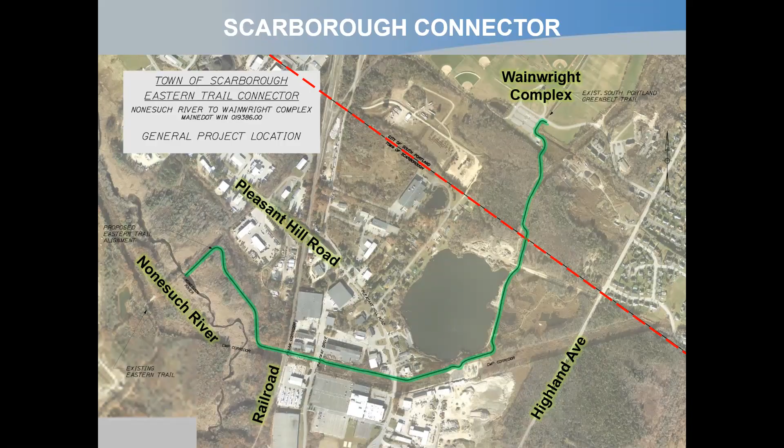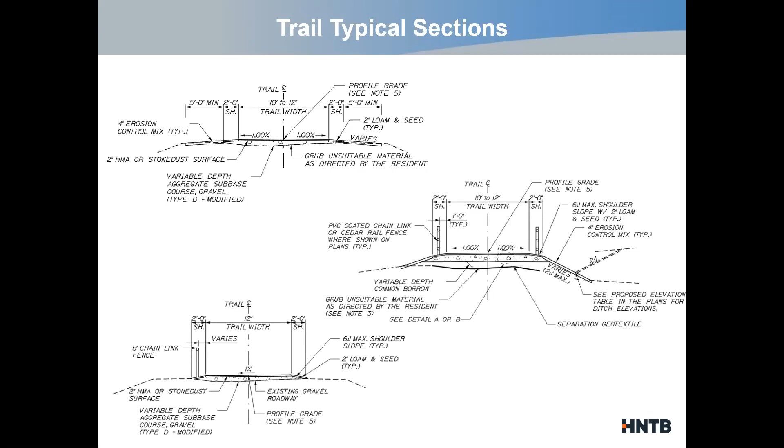So as we walk along that trail, I mentioned there are some very different sections—a river section, an industrial section, a pond, some woods. It's going to feel very different as you walk along this trail. But for the most part, what you'll see is a path that's 10 to 12 feet wide, either paved or lined with stone dust, that fine gray aggregate you've probably seen on a lot of trails. Depending on the topography, you may not have any railings at all on the side of the trail, or there might be railings on one or two sides if there are steep drop-offs, privacy concerns with landowners, or mitigation concerns with wetlands. I know these are just black and white graphics, hard to conceptualize, so I brought along a few slides to give examples of what this might look like.

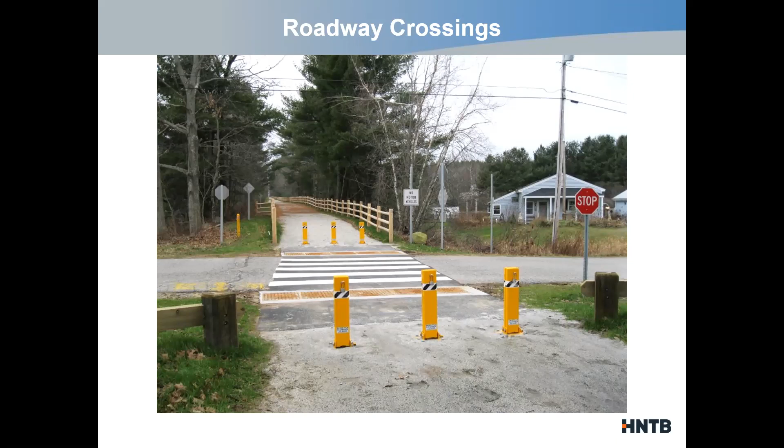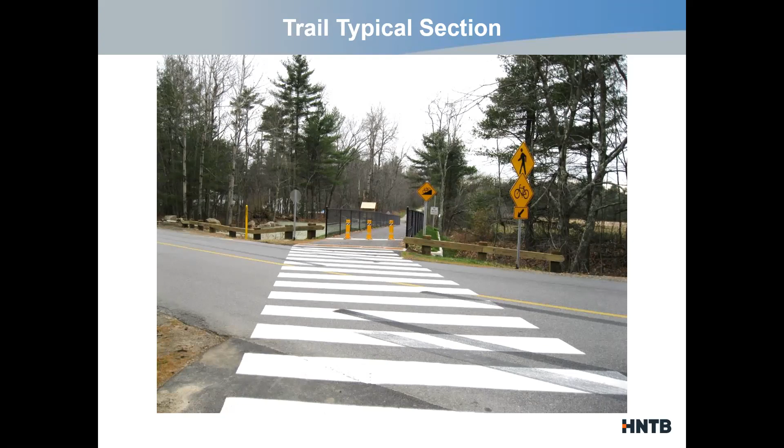So that's an overview of what the general sections will look like as you travel along this trail. Now I wanted to take a deeper dive and walk through the trail with you to provide an overview of what you might see.

It's not a very big crossing. The Nonesuch River crossing here is only about 35 feet long.

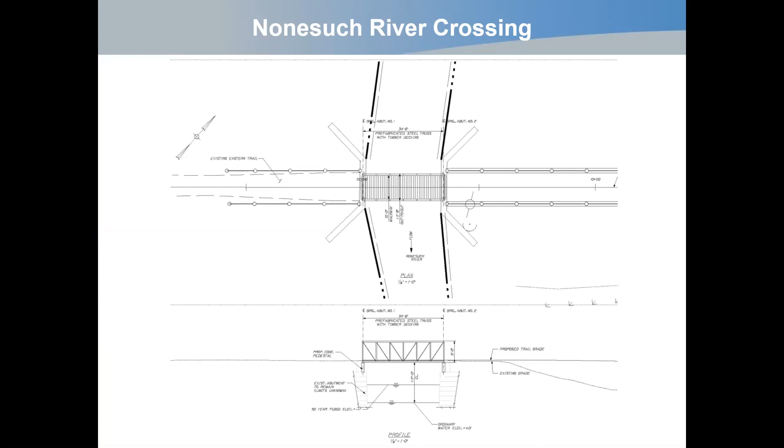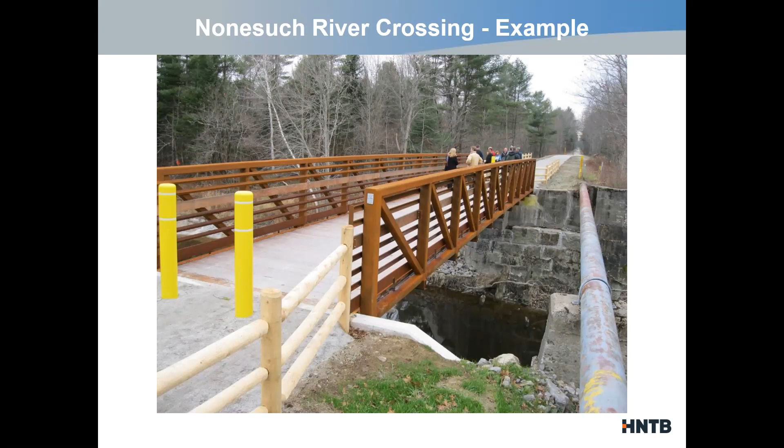You can see some stacked granite abutments or supports underneath that bridge. And just another example picture of what that might look like if you were looking from the side of the trail as it wraps around.

Where is that crossing that you just showed, out of curiosity? This particular one, I would have to go back and look. I forget, unfortunately.

It looks very similar. Yep, it is, very similar, and I believe it's along the Eastern Trail, down in Biddeford. Is that about the same scale as far as the distance, the length of the crossing? Yep, it's similar.

This one we see here is a little bit longer. I'd say this one's about 50 feet long. So a little bit longer and a little bit taller off the water, although it depends what time of day, because the Nonesuch River is slightly influenced by tidal fluctuations. Very slow moving, but slightly influenced.

We'll be going out there and putting a concrete cap on top of those abutments, simply to level things off and make it easier for that bridge to be dropped in.

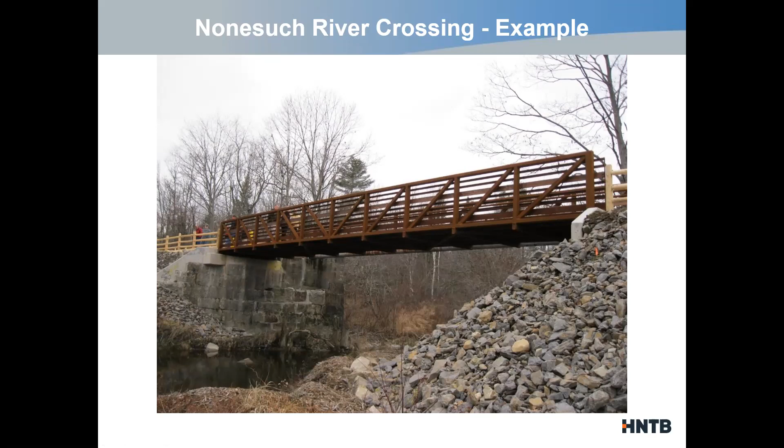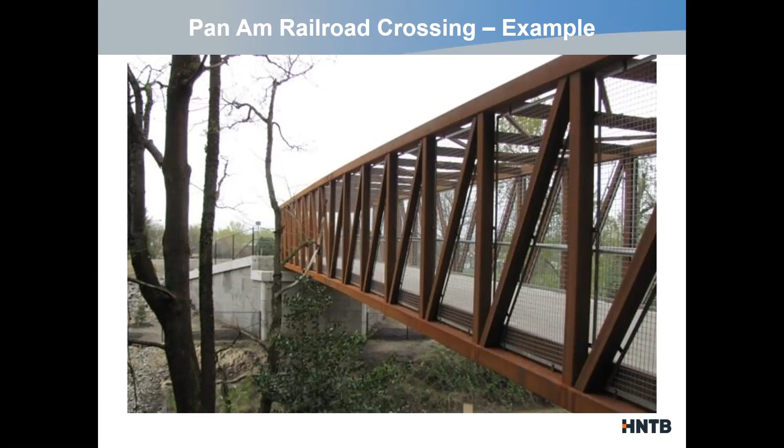So again, what'll it look like? This one's a little harder to find example photos of, but I found one that was pretty close. It'll be another prefabricated steel truss, but because of the overall bridge length, the sides will be a little taller and it'll actually have a top to it, so it's essentially walking through a big box. On the sides will be chain link fence or mesh to prevent people from throwing things onto the railroad tracks or littering, which is very common for crossing railroads. From the inside you might see something like this, though I can't guarantee nice tall pine trees like this going down through the industrial area.

So we come up over the railroad tracks on the left-hand side of the screen, 23 feet in the air to get over those tracks, and immediately start coming straight back down a trail to cross Parkway Drive at grade. It's a very steep hill to go up and over those tracks and back down. Once we get to Parkway Drive, we have the typical guardrail and sign package I showed you a picture of earlier.

We then cross Parkway Drive and go through the CMP corridor, which has a lot of different brush conditions along the back edge of these buildings. Then we make our way over to Pleasant Hill Road, which is really the next segment of our trail section, going from Pleasant Hill up around the pond. Pleasant Hill Road, as I'm sure you're all aware, is a very busy road, and we're crossing it right along a curve, in this generalized area.

This is another place where we negotiated with property owners and CMP, and we pulled the trail away from the northern edge of their right of way, down between the two power lines, to cross at a slightly better location with better visibility. Recognizing the high traffic speeds, the curve in the road, and pedestrian safety, we're putting in a quite extensive sign package here and some flashing beacons to warn vehicles of pedestrians crossing at this location.

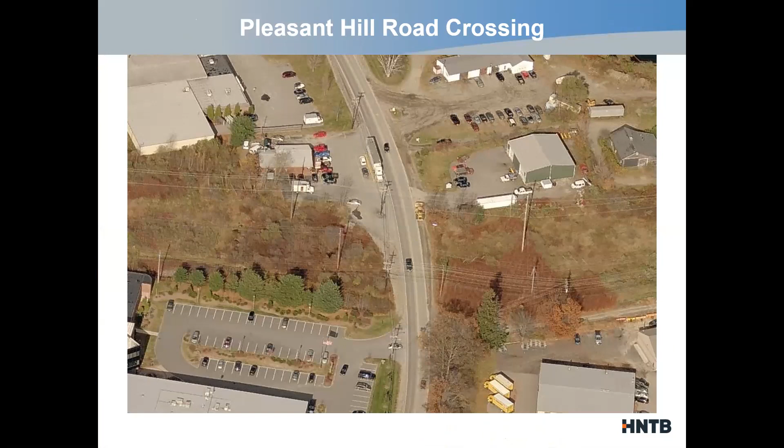That was an intentional decision we made after discussing constraints with CMP, trying to better align the project with its overall goals of providing a nice scenic view along the trail. So we're hugging the pond for a better view and getting away from that massive CMP substation out there, which would have been riddled with a lot of different constraints and hurdles to get through. We're moving away from that, hugging the pond, and things are better for everyone.

As we work our way along this trail, which wraps all the way around the pond, you can see it meets up with another driveway on the upper right-hand side of the screen. This is where we cross over a private drive, partially owned by a private land developer as well as the Portland Water District. We start to cross through a series of woods and man-made ditches that were built 50, 60 years ago. So this is where we start to see a lot more trees, a lot more private setting, and a lot more like that first trail section I showed you a picture of.

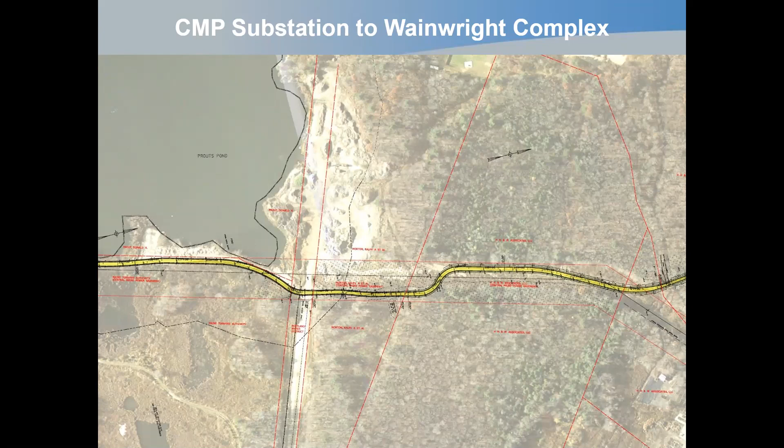This last image here as we enter the Wainwright complex is another location where we had to deviate from the original trail plan. We were cutting across the corner of a private parcel to reduce wetland impacts and reduce the number of ditches to cross. These ditches aren't huge, anywhere from 8 to 15, maybe 20 feet wide, and they'll be crossed with timber bridges. We were trying to go through there for overall betterment.

However, discussions with landowners pushed us to stay within a utility corridor as long as possible before making a turn up into the Wainwright complex. It's not a big difference—I think it added one little timber bridge—but in the end, it made the landowner happy.

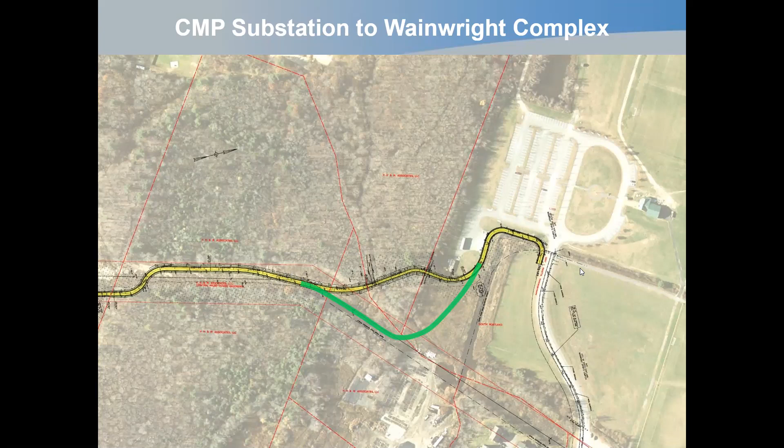Once we get up to the Wainwright complex, we simply follow the sidewalk around, and we are then across the driveway entrance, continuing on with the Eastern Trail once again. This is just a bird's eye view of the overall area, and you can see numerous ditches throughout, likely trying to dry the land at one point.

So that's the overview of the project and the trail walkthrough. Where are we? This project has been active since, I believe, 2011 or 2012, trying to find the right alignment and move it along. From a design perspective, building a contract for a contractor to work with, we're 98% of the way there. We've delivered what we call a 98% milestone and received comments from the town and the Department of Transportation. We have a handful of comments to correct, which update some contractual agreements, but we're essentially there in terms of figuring out what the trail is.

The bigger hurdles are more on the behind-the-scenes permitting and negotiations. We've received our draft environmental permits, meaning the Maine DEP and the Army Corps of Engineers both agree to the impacts and feasibility of the trail, and we've been able to move forward. However, we're not allowed to get final permits until we've secured all right-of-way for the trail—all easements, license agreements, etc. We're also negotiating small changes to the trail with a couple of landowners, which means we'll have to cycle back through the environmental permit application one more time to discuss changes with those permitting agencies.

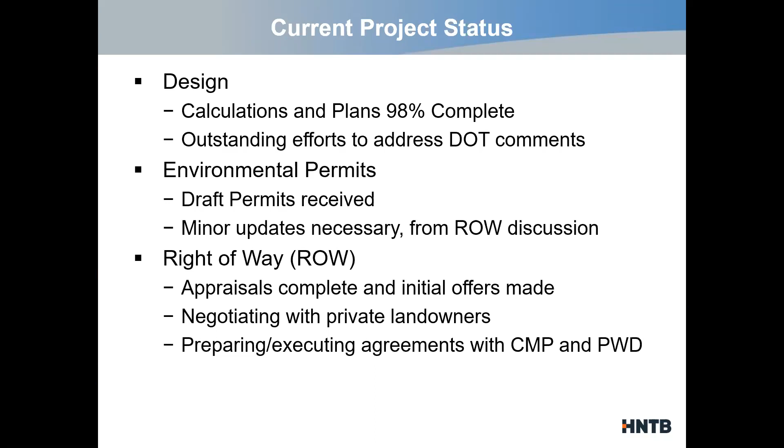We are currently really focused on right-of-way negotiations. We've done an appraisal of the impacted lands, made offers to the landowners, and now we're negotiating to try to find an agreement to construct the trail and move forward. There are a couple of private utilities, CMP and Portland Water District, where we're in the midst of preparing and executing agreements—we've come to terms and are moving forward. So it is positive. We do have some counteroffers from different landowners as well, and we're working through all of that.

So what does that mean for schedule? I do see the light at the end of the tunnel and am hopeful this is all going to advance. We're currently targeting wrapping up all the right-of-way negotiations, recording easements, finishing the last 2% of design, and getting those permits in hand to construct the trail and put this project out for advertisement later this year. Once advertised, it's going to be about 18 to 24 months of construction, really dependent on the power outages we're allowed to do to put that bridge in place.

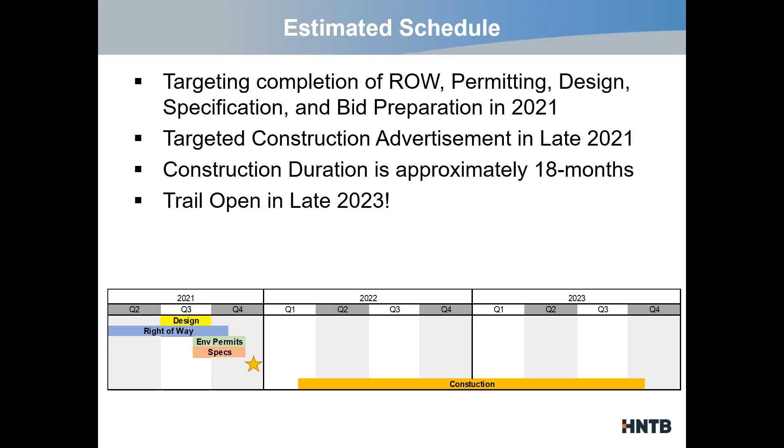With that, I'm going to leave it open for any questions you may have, whether it's about part of the trail, the process, or whatever it might be. I'll do my best to answer.

Question: I know there are flashing lights at various road crossings—is the intent to have those at every major road crossing, or just at places with fast traffic? Right now the only place we're looking at a flashing beacon is on Pleasant Hill Road. The crossings we have are Parkway Drive, a private industrial drive with some traffic but much less significant and slower speeds, and Pleasant Hill Road, plus a private drive partially owned by Portland Water District in that industrial area, which sees 1 or 2 cars a day moving at 10 miles an hour.

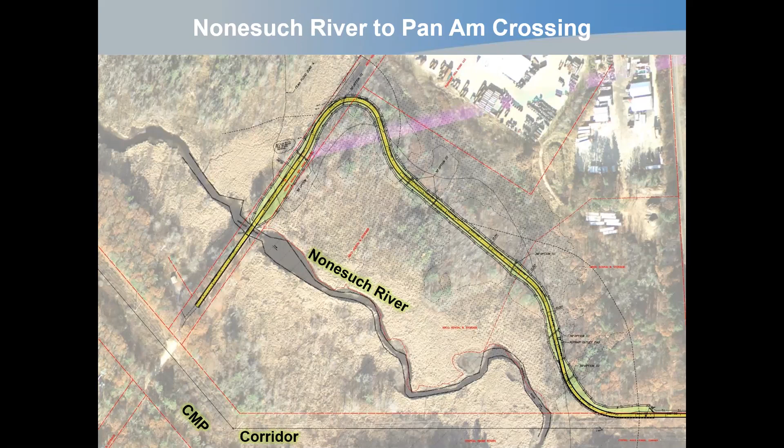So to that point, this view on screen doesn't do it justice because of the angle. When the bridge is in its final condition, the closest power line will be a little over 20 feet away from it laterally, so it would take quite the swing to hit the bridge. On top of that, we've been working with CMP to make sure that bridge is grounded, so it won't create shocks. The whole reason we have to kill the power during construction is because we have cranes sticking up in the air, and if those cranes tip over and hit the lines, that would be a major problem.

Josh, in relation to that railroad bridge we were just talking about, I believe earlier in the project there was some concern with local abutters regarding the right of way that was required, and that there might have been issues. Are those all resolved now?

Essentially, yes. The issues with those landowners — we are no longer impacting their right of way whatsoever. And conveniently, there's a private drive through this area, just off to the right-hand side of the screen, that crosses the CMP corridor. CMP has actually worked with us to help restore some easement language with that property owner as a benefit to the project and help things move forward. So those concerns have been addressed. Okay, thank you.

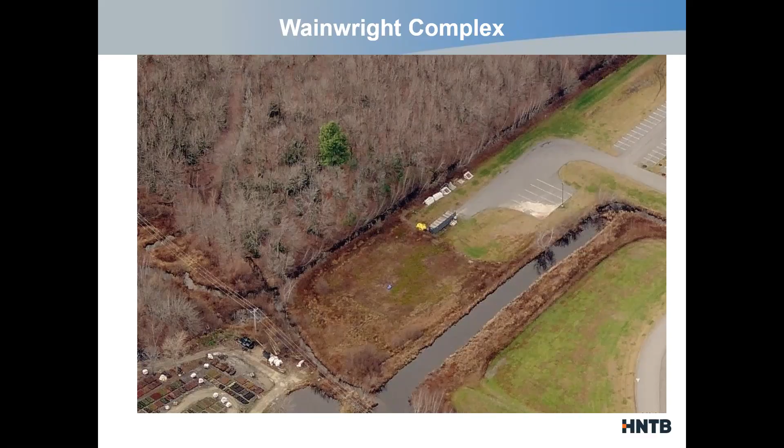Two of the active rails, yes. Amtrak comes through here and goes to the Portland station. So once you've put in the new bridge over the Nonesuch and where you're laying the new trail along the older rail corridor, even before that.

Going south of that, no, there's nothing there for quite a ways. No rails in there. So it's just the land. Correct, yeah, CMP actually took that over as part of their property almost a century ago. Cool, that makes it easier.

The thing that's interesting, Angela, is I've read the pieces occasionally, like in the Leader, about what's going on, but it's easy to forget all this stuff. To the best of my recollection, the biggest issue was always the bridge over the Nonesuch. And that doesn't seem to be as much of a problem as the bridge over the railroad tracks, which I was not even aware of.

The one over the Nonesuch is quite simple, but it's got some little challenges here to make sure it's in place correctly. The one over the railroad tracks is quite the challenge to make sure it's put up and timed correctly. It's like the ultimate 4D project.

I'm sure some contractors will be asking questions about it. It can be tough. And I had one more question about, is there any other trailhead parking?

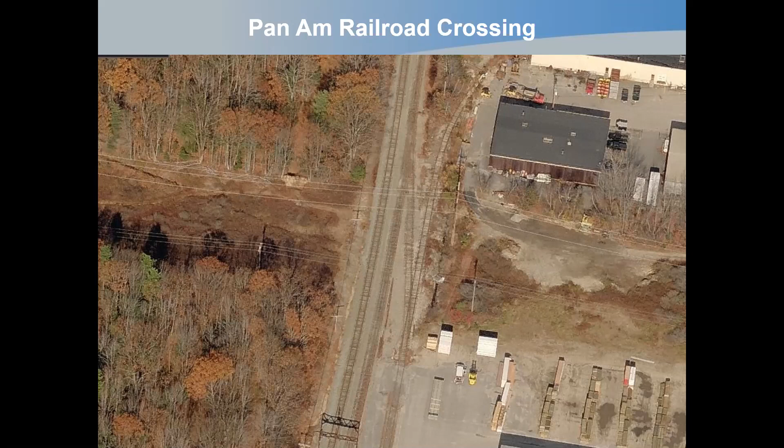Is there any spaces being allocated around like Pleasant Hill or anything like that? No, nothing specific. So obviously the Wainwright complex is kind of the big one. There's no official parking. I was trying to see if I had a slightly better view. I don't.

There's some parking spaces over in this general area where the trail is currently shown to cross, but we're actually zigzagging a tiny bit in here. It's within CMP's corridor, kind of along the edge of the road, a big gravel area. I'm sure informally somebody could park there temporarily, but it's certainly not signed as such or planned as such.

Has anyone had any conversations with Hannaford about maybe allocating some of their parking lot for public sharing? I drive by there twice a day, and honestly, they just have a fraction of the people parking there now that they did once before. And I don't know their business plan enough to know if they're going to bring everybody back or not.

But it also just kind of seems like, particularly for a big business like that with such a large parking lot, even if they were made available outside of business hours or something, that would seem like it would be such a great opportunity.

That's actually McBrady property, Jennifer. So that's the group that owns a big chunk of land in that area. Correct. They actually own Parkway Drive, which is the private road that CMP helped us with. So I'm not sure how open they would be to having additional people come up the road and park there.

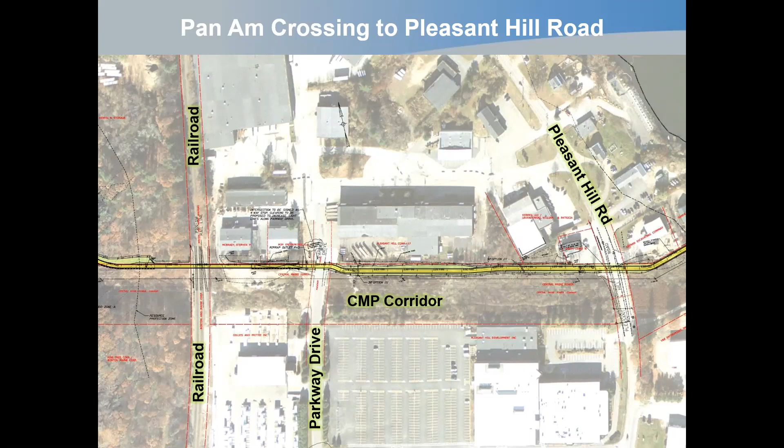Well, thank you for putting this together on pretty short notice. I gave you a week or so, but I really appreciate you taking that time, because this has been a project that's been long coming and has had some gaps along the way as far as information getting out. So I think this is helpful to re-engage this group, and then we can be a resource to try to pump out some information to the public as we move forward. I think that would be good.